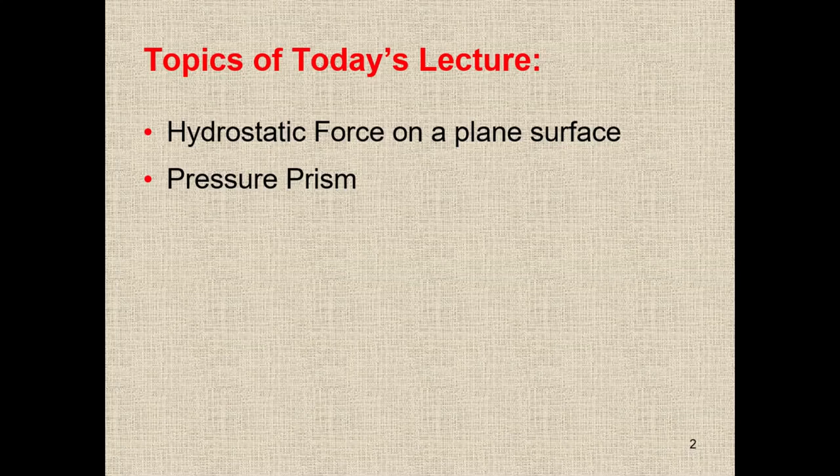Pressure and fluid statics - the topics we are going to cover today are the hydrostatic force on a plane surface and pressure prism. Hydrostatic force on a plane surface means when a surface is submerged in a fluid, forces develop on the surface due to the fluid.

Determination of these forces is important in the design of storage tanks, ships, dams, and other hydraulic structures. For fluid at rest, the forces developed on the submerged surface are due to fluid pressure and are perpendicular to the surface, regardless of whether the surface is horizontal, vertical, or making any angle with the vertical or horizontal.

For gases, pressure is uniformly distributed all over the container. Therefore, due to gas pressure at any particular surface boundary of the container, the resultant force acts at the centroid of the surface. For liquid, the pressure is not uniform - it increases with depth. Therefore, due to pressure at any particular surface, the resultant force does not act at the centroid but acts at a point below the centroid of the surface.

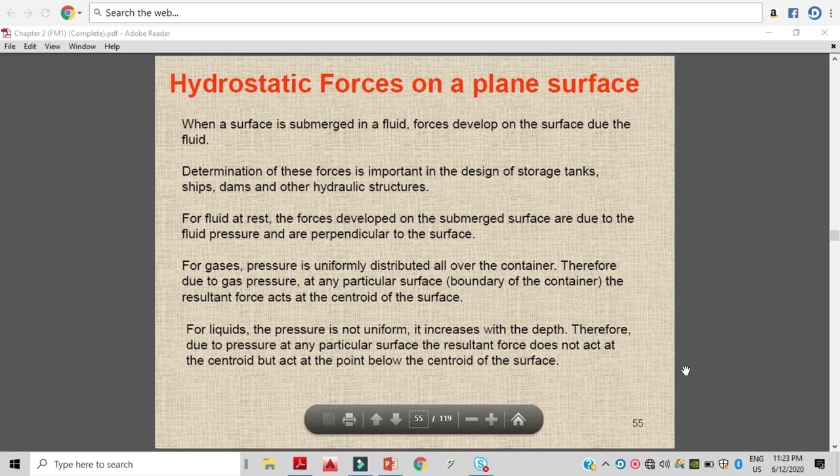Let's consider a normal case for the horizontal surface, such as the bottom of a liquid filled tank. Here you can see in the picture, this is the bottom surface, uniform and flat, and this is a vertical surface. At the moment we are focusing on the bottom surface, and we can see the distributed pressure on this surface is uniform.

In that case it is very easy to calculate the net pressure acting on the surface and also to find out the location of the net resultant force. We know the equation: the net resultant force equals pressure acting on a surface times area, where A is the area where the net pressure is acting.

So force equals pressure into area, that is Fr equals P naught plus gamma H, into A. P naught is the atmospheric pressure acting on the surface, or P naught could be any initial pressure acting on the free surface. So this is the net resultant force.

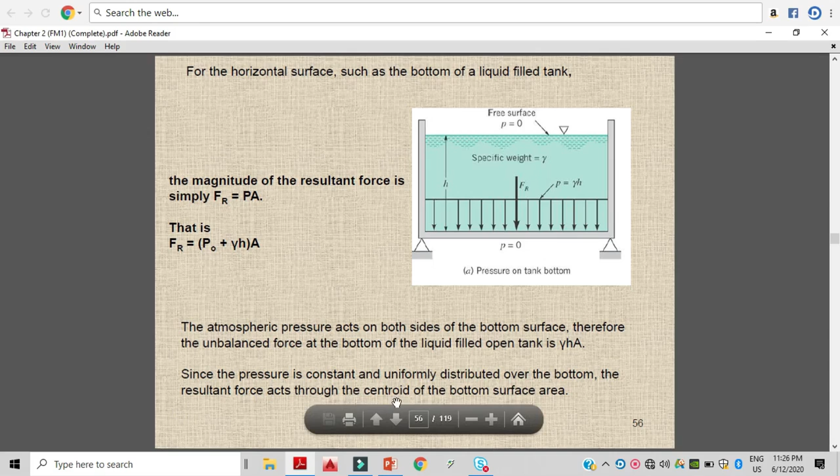So the only net unbalanced force, which is the hydrostatic pressure due to the weight of the fluid, is rho g HA - H being the height of the column, A the area at which the pressure is acting, and rho g being the weight density of the fluid. Since the pressure is constant and uniformly distributed over the bottom, the resultant force acts through the centroid of the bottom surface area. Let's move on to the next case.

Now we are focusing on the side surface, not the bottom surface. At the side surface we can see the pressure is gradually increasing, because the hydrostatic pressure is directly proportional to the height of the column of water. So as the column increases, as the depth of water increases, the hydrostatic pressure will increase. We can see in the sketch the pressure is gradually increasing as we go down, in the case of the side wall.

Here the pressure distribution is non-uniform, so in that case the net resultant force acting on this surface is not at the centroid, it will be somewhere below the centroid. But how below, how we can calculate the magnitude of the force and the location of the net resultant force, we will see in the next slide.

Here the pressure on the side wall of the tank is not uniformly distributed. We will learn how to determine the resultant force and its location for situations such as the one discussed here. Okay, let's move on to the next slide.

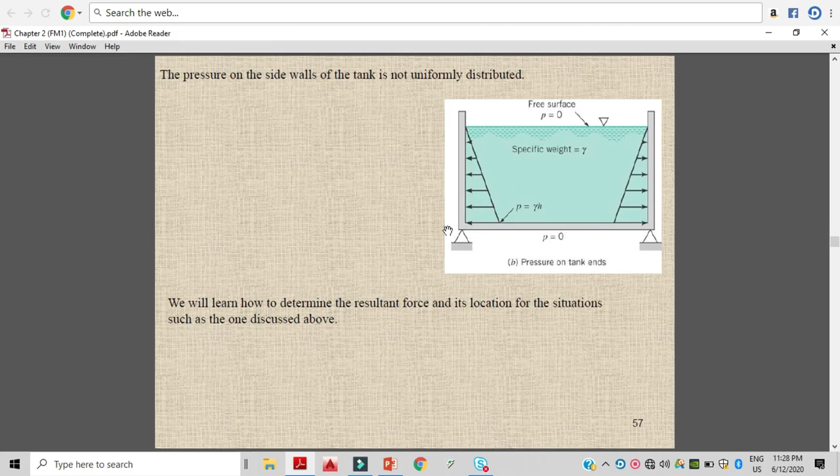Free surface is a surface where there is no shear force when the fluid is at rest, and there is only one force acting on the free surface, that is the normal pressure.

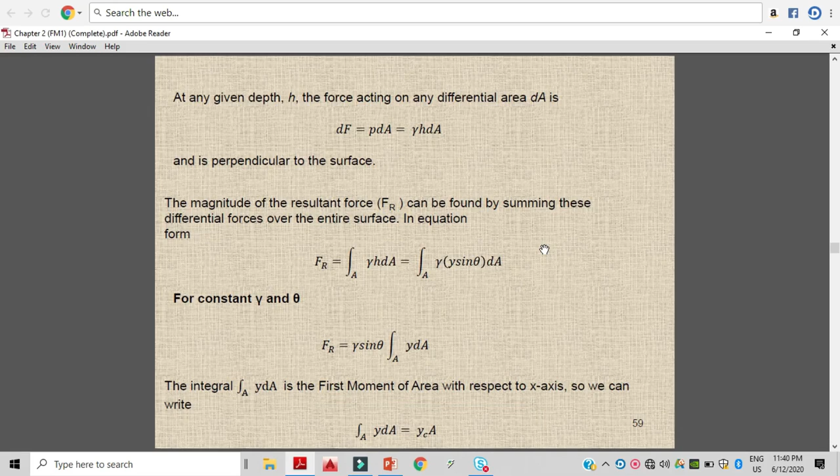So we have replaced this, where yC is the y coordinate of the centroid measured from the x-axis which passes through the origin. Thus the resultant force Fr can be written as Fr equals gamma yC, and gamma sine theta remains there, so we replace that with A yC. Because of that, the net resultant force equals gamma A yC sine theta, or simply we can replace yC sine theta with hc. So Fr equals gamma hc into A. The magnitude of the resultant force will be Fr equals gamma hc A. So we replace yC sine theta with hc.

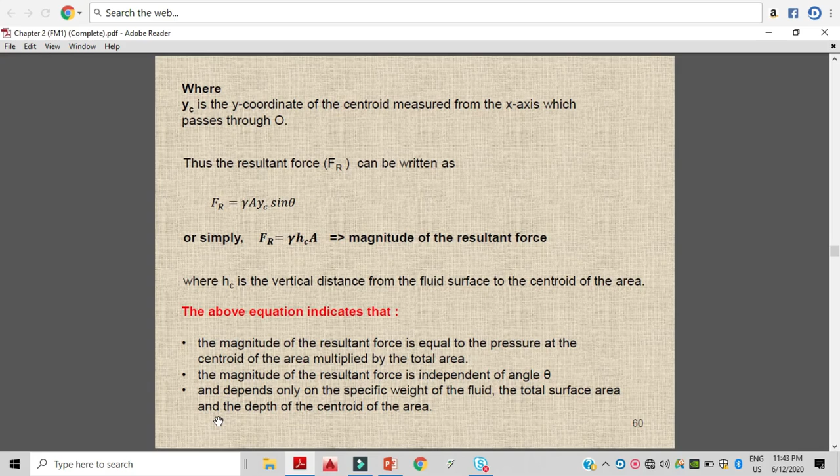So now we are going to determine the location of the resultant force. When an area is subjected to a pressure, a point in the area exists through which the entire force could be concentrated with the same external effect. This point is called the center of pressure. If the pressure is uniformly distributed over an area, the center of pressure coincides with the centroid of the area. In the case of non-uniform pressure distribution, the resultant force acts at center point XR, YR, located below the centroid XC and YC as shown in the figure discussed previously.

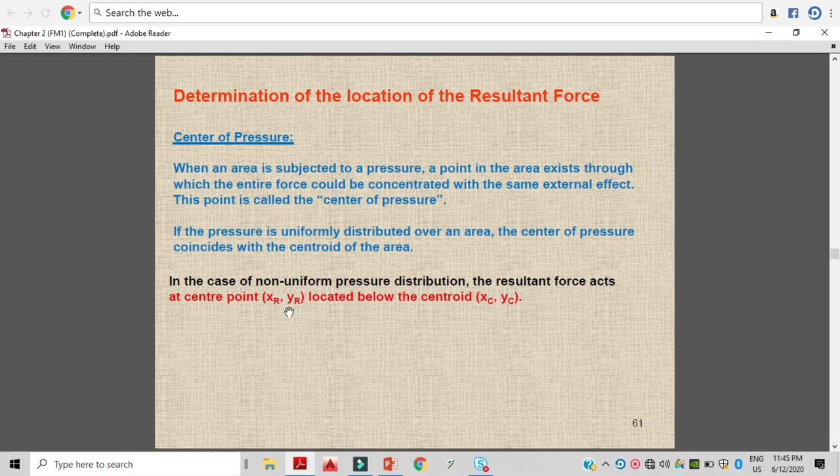Let's see how we can find the location of the net resultant force XR and YR. To find the location of the net resultant force XR and YR, we normally consider moments. Whenever we would like to find the location of the force, we take moments.

To work out XR and YR, we take moments of FR about the x-axis and y-axis. The moment along x-axis is equal to FR into YR, and FR can be replaced by dF, the small area. Similarly, My is equal to FR into XR, written in this form.

dF, the small area discussed previously, is equal to gamma H into dA, which we later replace with gamma Y sine theta into dA. In the same way, we derived FR is equal to gamma HC into A, and then we replace HC with YC sine theta, so it becomes gamma YC sine theta. We replace HC with YC sine theta, and H with Y sine theta.

Now we insert the value for FR in terms of theta. In the case of Mx, Y remains Y, and we replace dF with gamma Y sine theta dA. Similarly, X remains X, and dF is replaced with gamma Y sine theta dA.

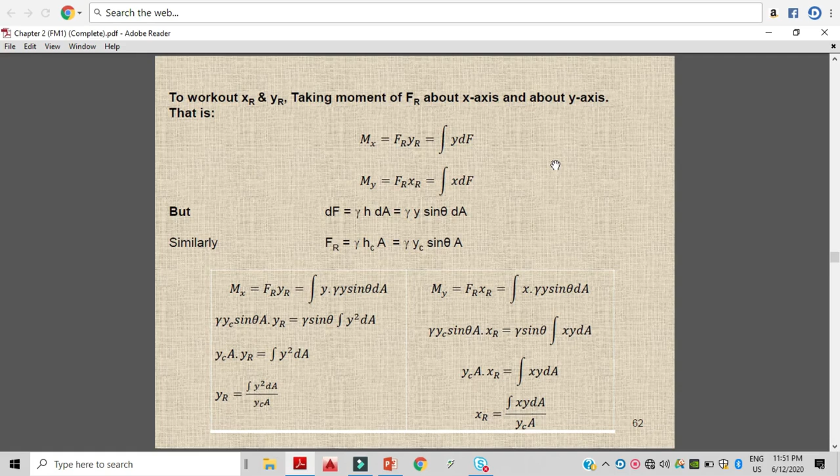The term, integration of Y squared dA, is called the second moment of inertia with respect to the x-axis, located at the intersection of the plane and the free surface, denoted Ix. The term integration of XY dA is called the product of inertia about the x and y axes, denoted Ixy.

So we replace this term with Ixy, and this term with Ix. Here, Ix and Ixy are the moments about the x and y axes.

These moments can also be converted to moments about the centroid of the plane using the parallel axis theorem. By using the parallel axis theorem, we can write Ix equals Ixc plus A Yc squared, and Ixy can be written as Ixyc plus A Xc Yc. Now we replace these terms in the previous equation.

So we inserted these values into the previous equation: XR becomes Ixy plus A Xc Yc, divided by YcA, and YR becomes Ixc plus A Yc squared over YcA. Simplifying, we finally end up with XR equal to Ixyc over YcA plus Xc, and YR equal to Ixc over YcA plus Yc.

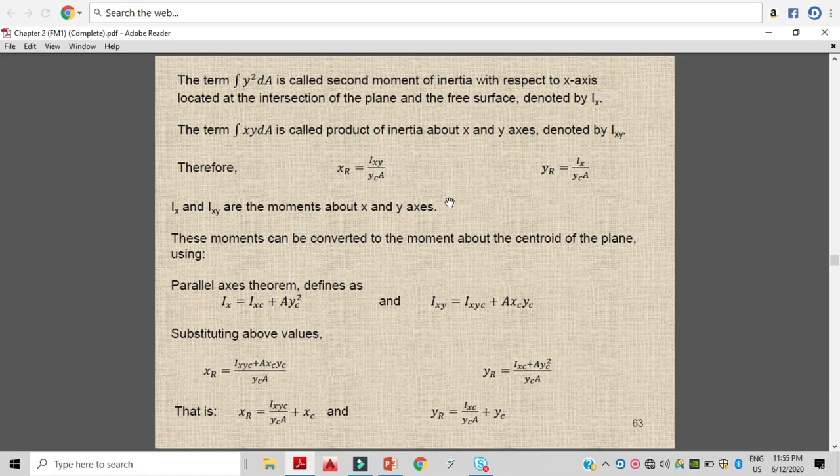These two equations indicate that, okay, we can physically see that when the distributed pressure is non-uniform, the net resultant force will always act below the centroid. Here you can see this is the distance from the centroid xc plus some value, and here this is the distance from the centroid yc, plus it has a plus factor. So that means the net resultant force will always act below the center. Let's see a practical problem that makes our concept more clear.

The problem is: a 4-meter diameter circular gate, as shown in the figure, is located in the inclined wall of a large reservoir containing water. The specific weight of the water is given. The gate is mounted on a shaft along its horizontal diameter. For a water depth of Hc from the centroid equal to 10 meters above the shaft, determine the magnitude and location of the resultant force exerted on the gate by the water, and the moment that would have to be applied to the shaft to open the gate.

So here we have to determine three things. Number one, we have to find out the net resultant force, Fr. Second, we have to determine the location of the net resultant force Fr. Third, we need to find out the moment required to open the gate against the hydrostatic force.

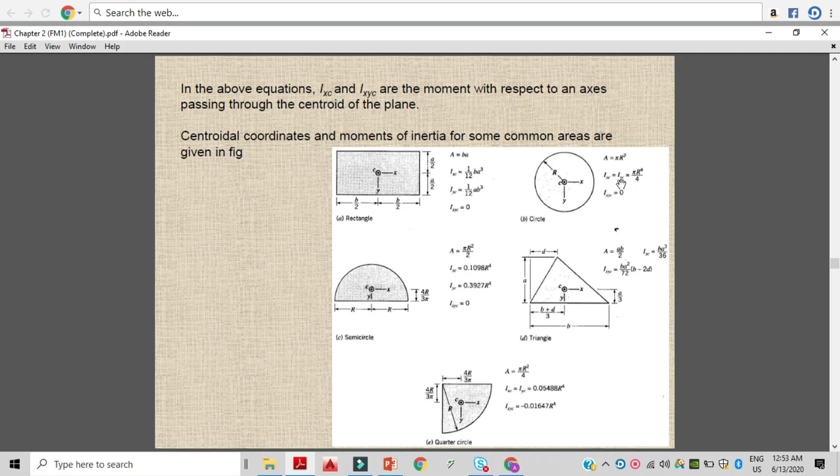Let's go back to the previous picture here. This is the circle, when the gate is a circular shape. So here is IXC, and IXC is equal to pi r4 over 4. So we can calculate now IXC is equal to pi r4 over 4. We know that R is equal to 2 meters.

So finally we end up with 11.6 meters. In this way we can say that the distance along the gate below the shaft to the center of pressure, so YR minus YC, is equal to 0.0866.

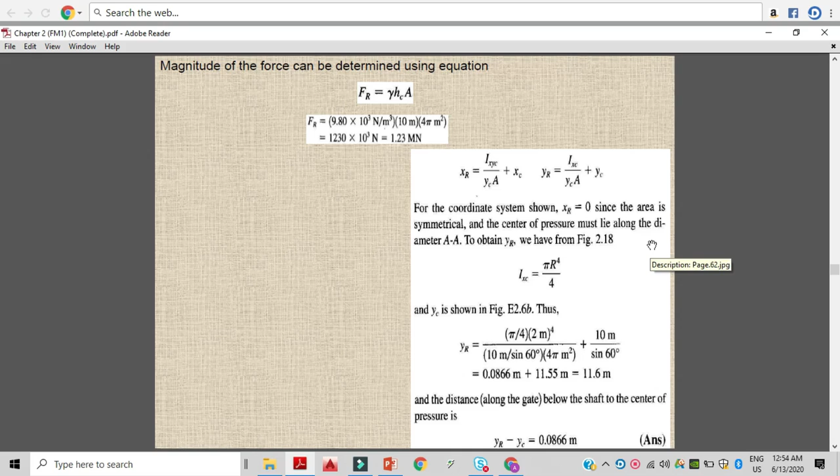So pressure prism, what exactly is it? Consider the pressure distribution along a vertical wall of a tank of width B. Consider this is the width in a 3 dimension. If you can see, it is appearing as a prism.

This is the width B. This is the maximum pressure which is acting at the bottom, because this is the maximum height. So this is gamma into H, and as the height is reducing, the pressure is reducing, and at the top it is equal to 0. So from 0 to maximum it is making a triangle, and along the depth the triangle is continuing, so it's giving you the shape of a prism.

So the pressure distribution is like a prism, so it is called a pressure prism. In figure B, this shows the 3-dimensional representation of pressure distribution. The base of the volume shown in figure B is the pressure area. Space is the area of interest. Altitude at each point is the pressure. The volume shown in figure B is called the pressure prism.

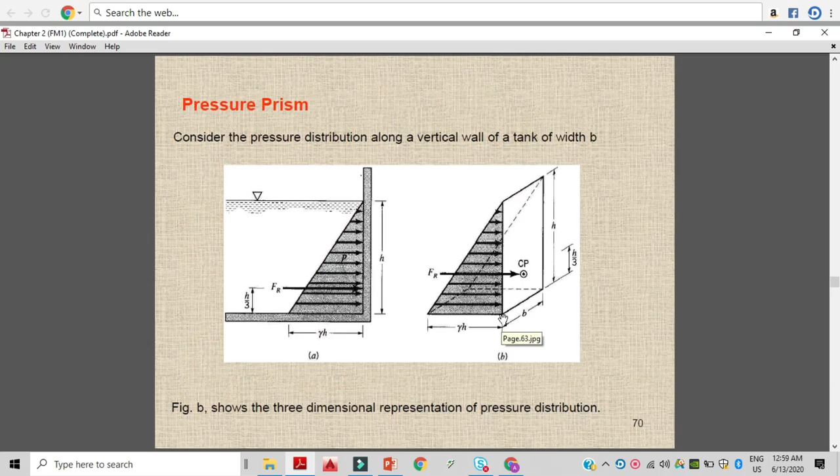So this is basically showing that the volume of the prism indicates the net resultant force acting on the surface. This is another way to calculate the net resultant force using this technique. So if you have length, width and height, this is the special case of the case we have discussed before. So here you can see this is the case.

If you take theta 90 degrees, this plate will go straight vertical like this. So this is the special case of the pressure prism. The resultant force must lie on the centroid of the pressure prism. So in that case, the resultant force acts on the centroid of the pressure prism, which is located along the vertical axis of symmetry of the surface and at a distance of h by 3 above the base.

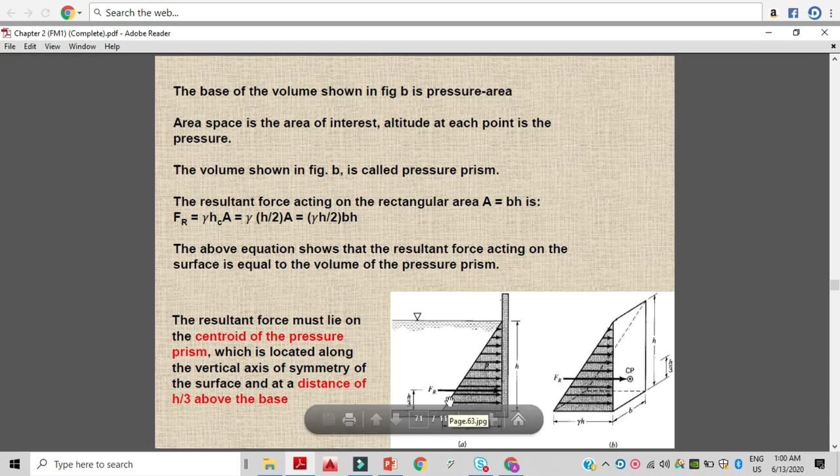This is basically the standard technique, so if you know this and you have a case like this, straight away you can find out the net resultant force if you know the length, width and height, and also you can find out the location of the net resultant force using this technique. So here is an example - we will solve it in the next lecture.